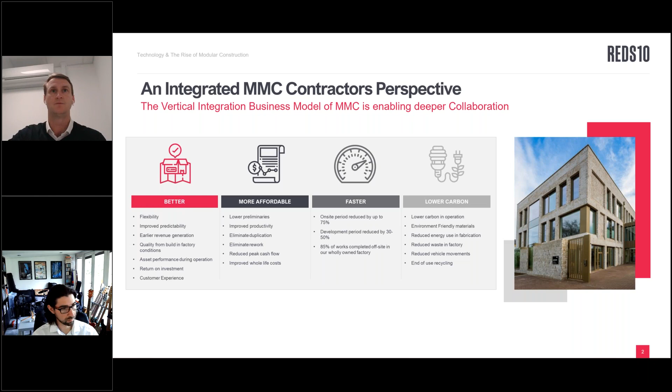More specifically about MMC collaboration - I think when everyone talks about it, the buzzword often mentioned is 'get the design team involved earlier.' However, there are a lot more aspects to it which feed into that collaboration, which I'll go through now.

First of all, you've got the factory element - the guys actually on the factory floor. We're getting input from the guys who are actually building it. Because we're vertically integrated, we've got that line of communication - we all work together within a factory environment, so they're feeding back into us and the design team on what works, what doesn't work, and we're getting real-time feedback.

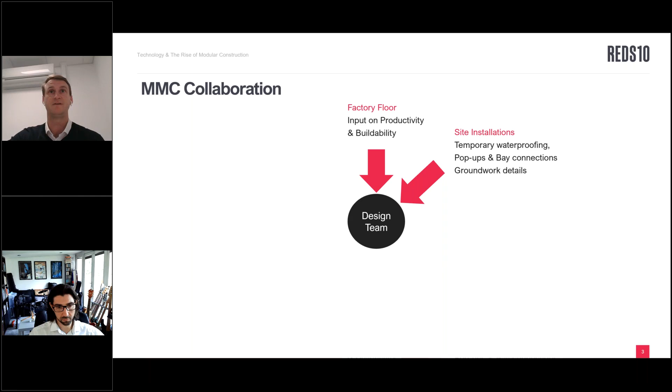Also, we've got the site installation team, so what works in terms of when it goes to site - how we leave the roof, the bay joints - that's all fed back into the process and to the team. A really important part is the pop-up and bay connection, so below ground drainage and so on - I'll come onto it later and show an example of a builder's work hole and how it's used, and how through having a federated model we can coordinate where the pop-ups are and make sure they're in the right place.

The site fit out, so we can improve the speed of the site fit out. We're reducing the amount we'll have to do on site, and we're increasing what we can do in a factory. And as I touched on earlier, this is helping with reduced site programs.

Cost, so the design reflects the budget. Also, one thing we have found on cost is we know our costs because we're building the same thing again, and we're getting to a stage where through collaboration and standard details and federated models, we know exactly what it costs us to build because we're doing the same thing again and again. So we're getting that cost advantage, and also we've got the opportunity to reuse any stock materials we have.

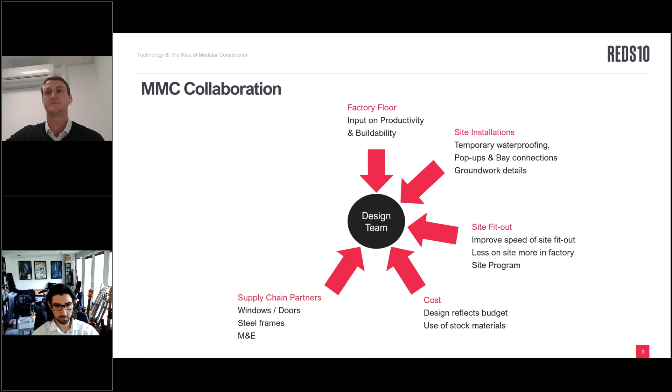Supply chain partners. A big part of what we do is we involve specialist subcontractors very early in the process and get them to work with the designers. So that might be the external windows and doors. There's always a lot of detailing around that, internal doors, the structural steel frames, the M&E subcontractor. These guys and the supply chain partners we've got are all working in Revit, and they're feeding into our standard details and liaising with all the designers. So we've got the collaboration there as well.

Also, the compliance with building regs and any specific client requirements. When I talk about client requirements, specifically if there's net zero, you're designing for net zero from the outset. If there's BREEAM or a DREAM requirement, again, that's the whole team working on that from the outset, and smart building technology.

And then also we've got the federated BIM model with standardized details. So if we just go.

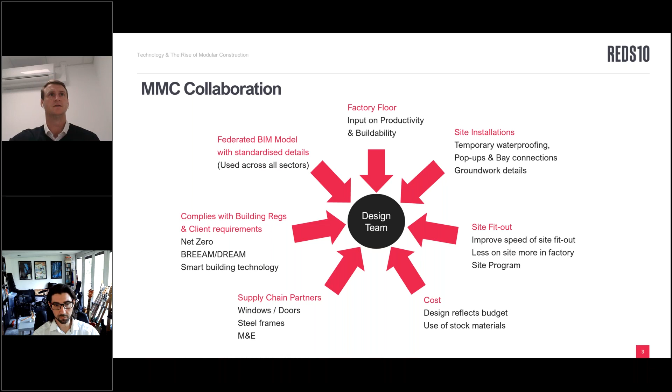So development of a fully federated model. All of the items on the previous slide feed into and inform the federated model. This is helping us to improve design coordination. Elements such as pipe, clash detection there. You can see on the diagram we've got some examples of pipe and containment, AC and FF&E and dado, and that type of thing. So it's helping with those.

And it's increasing our PMV, and ultimately it's reducing site works. So yeah, those diagrams there just show some examples of M&E and FF&E clash detection.

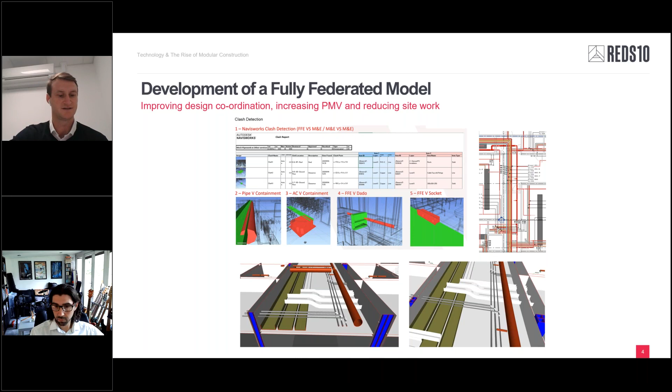Next, coming on to standardization of design and the power of having a fully federated model. This slide shows some of the standard details we build to in our factory. We keep these stored centrally and continuously review and update these. Also, we've got constant feedback coming back from the guys on the factory floor.

Our operatives are actually doing the works. So if they say a detail doesn't work for any reason, that's fed back into designers who then update the standardized detail. So there's that constant sort of 360 review going on.

And also, I mentioned earlier, you can see the bottom three diagrams there. It shows the standardized detail for a builder's work hole, and then you've got the 2D plan there, which references the detail for the builder's work penetration, and then finally you can see it in action there, where that green box is the builder's work hole for the pop-up for the drainage there, and that's all modelled and overlaid.

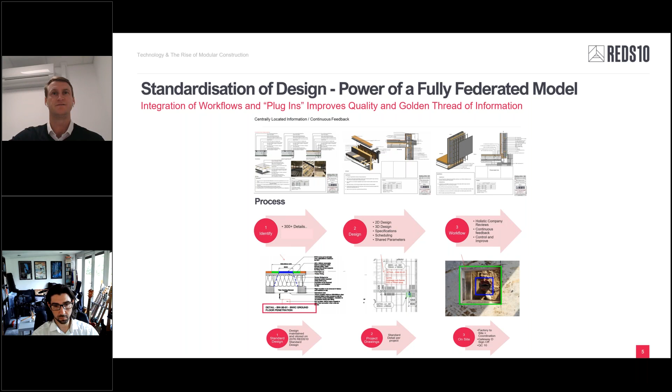One thing we do is we do an as-built survey scan of the drainage and the foundations. We then overlay the federated model on that before it comes to site, so we know our builders work holes are accurate and the drainage is in the right position. So that's a great advantage of using the federated model and the whole collaboration around it.

Ultimately, the MMC and the whole collaboration is helping show how we can reduce both the embodied and operational carbon. And I think MMC has given us a head start on this.

And that was things such as removing the concrete floors and going for a CaberFloor particle board. So we lost the embodied carbon from the concrete there, and going from having china troughs and urinals to having metal instead.

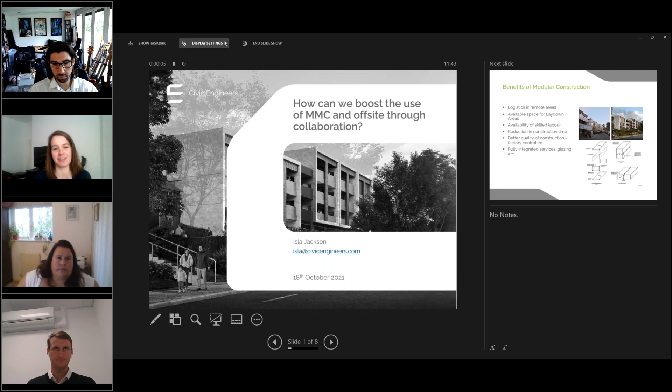Morning, can you hear me and see my screen? Yep, all perfect, brilliant, thank you. So morning everybody, my name is Isla Jackson, I'm Director for Civic Engineers in our Scotland studios, and we've been working on quite a few projects recently to do with modular construction and offsite construction.

So the benefits of modular construction, I'm sure you're all well aware of it, particularly in logistics in remote areas. We've got a project up in Shetland, for example, which I'll touch on further in the presentation. Availability for space and space for laydown areas is also very helpful. Availability of skilled labour, again, particularly where you're performing construction in remote areas. Reduction of construction time, which has already been touched on, and better quality of construction because it's factory controlled, with fully integrated services and glazing, etc.

So the project that we're working on in London, that you can see on the right hand side of that slide, is 215 homes in the London Borough of Greenwich. Basically we've been working with the contractor to develop the modular construction for each of these modules. I think there's still a way to go yet in terms of optimization, but it's been a real learning curve for us as civil and structural engineers to really try and work with the factory and make sure that we're making it as efficient as possible, both in terms of being able to fabricate it easily, but also from a constructability point of view.

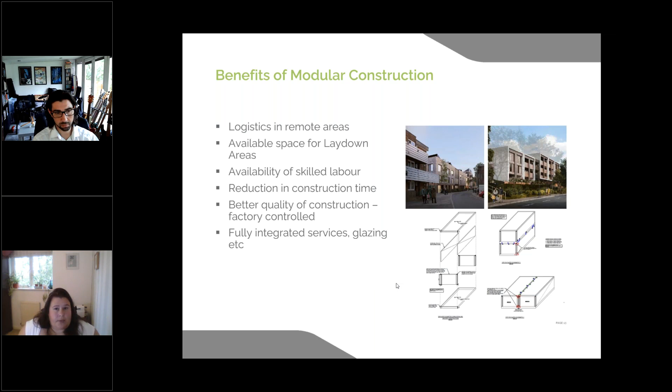But there are challenges, and I think this is probably the angle I was coming at it from - how do we actually approach these challenges for modular construction? I think what we've learned certainly recently is that early knowledge sharing, both between the client and the contractor or the manufacturer, and early coordination, particularly for things like balconies and details like that, is the overall responsibility - particularly in Scotland, and I'll touch on the difference between Scotland and the rest of the UK in terms of who's responsible for the overall design and structural stability of the building.

But there are other things we need to look at, and fire stopping in particular is something that should be considered. There have been a couple of incidents - can you still see my screen okay? There's been a couple of incidents in the Shetland Isles in particular where there's been fires, one in the Moorfield Hotel and also the Fair Isle Bird Observatory, both of which buildings were lost. Luckily no loss of life, but that is something that makes people a little bit nervous in terms of modular construction.

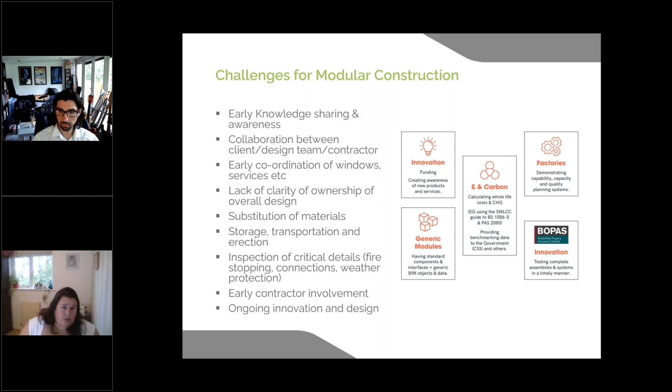Perhaps we can have a discussion about that later at the panel discussion. So, slight differences between Scotland and the rest of the UK - we have SER, the Structural Engineering Register in Scotland, and that means a certified engineer has to take responsibility for the overall structural performance of the building. That means we have to check, even if it's a subcontract item such as balconies, we are responsible for checking that those calculations have been carried out to our satisfaction, to make sure the building has an overall owner, if you like.

And again, following the Grenfell tragedy, there is more of a highlight going forward - I think it's the new fire safety bill, which is looking to have an accountable person on projects. So that may become more and more a thing that's highlighted across the full UK. But it is quite interesting when you're doing projects both in Scotland and England, how different it can be in terms of the approach and how you use stage warrants, etc., for building control.

So this is just an image that was taken from the iStructE. They're busy at the moment coming up with all sorts of different elements. Again, I think Michael touched on the advantages of modular MMC in terms of the carbon, but I think we need to have a look at it and really challenge ourselves as designers in particular.

As you can see at the beginning, 50% of the embodied carbon would be within that first section of either product manufacture or design. So we really have to challenge ourselves as to where the materials are coming from, how they're being transported to site, and the manufacturing methods included to really get the overall view in terms of how well it performs in embodied carbon.

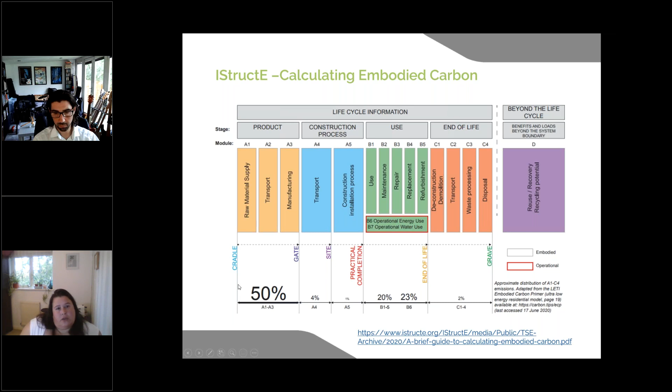However, there's also the circular economy element, which is more and more coming to the forefront. Actually, it doesn't go cradle to grave, it's more cradle to cradle. We should be looking at how we actually deal with those buildings, how we take them apart, how we reuse and put that back into the system.

So this cradle to cradle circular economy approach is probably something we'll see more and more, particularly as the industry as a whole is starting to challenge itself in terms of how we design things, selection of materials, and how we go about minimising our carbon footprint.

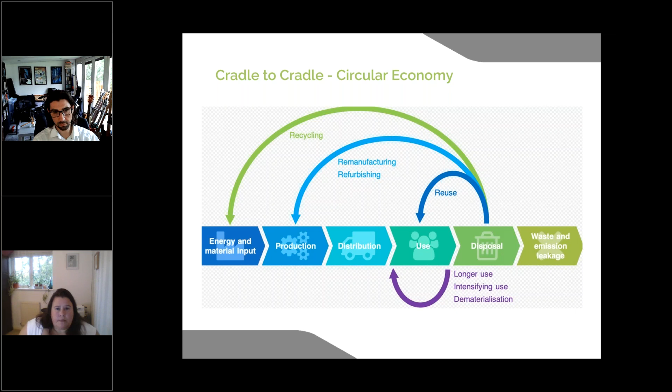This is just really a slide to show that in terms of reuse of buildings, if that's an option, that is preferable, I suppose, to knocking them down. It's the combination of modular and building reuse that is really interesting. More and more we're seeing existing buildings being renovated and modular construction, because of its weight savings etc., being used particularly for residential to place penthouses and apartments on top of these existing buildings.

So I think there's a real opportunity as an industry for us to look at how we calculate the carbon correctly, and to not kid ourselves that it's just a one-size-fits-all approach. Obviously we have to look at the whole thing, and that could be from the reuse of foundations from an existing building if it has to come down, or if there's been a fire, for example.

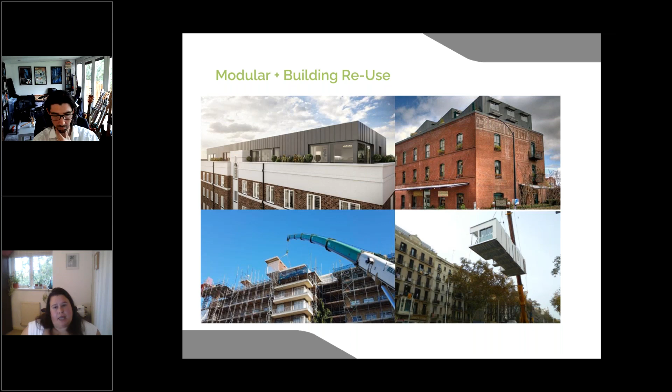So I think there's lots of things to consider. There's a way to go yet, but my sum up would be it's that early involvement, real challenge at the beginning with the client's buy-in to the material selection and how we actually go about designing it, and making sure we have somebody overall in control of building for all elements so that it can be looked at holistically. And that's me for just now.

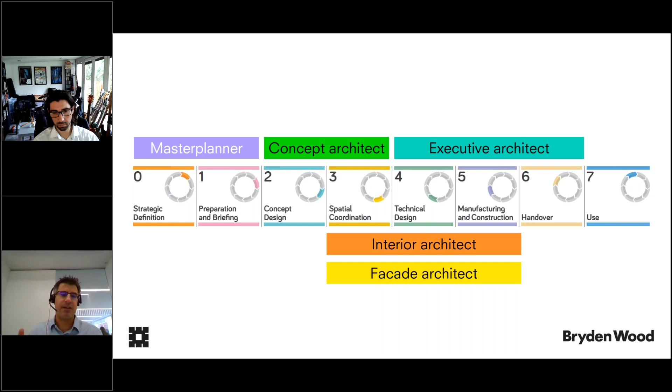We also, for very good reasons, split projects into what we assume is a very linear, sequential way of working, and very often people only work on one part of the project - the first couple of stages, or the concept, or whatever. As Michael said at the start, MMC is not really like that. We can be considering something in the manufacturing stage, and it might tell us something about how we should design the overall building - if you worked out you could get much greater flexibility of spans or grids, it might tell you something about the concept design. So MMC likes to bounce around between all these stages, and it doesn't really recognize the artificial stages that we've put in.

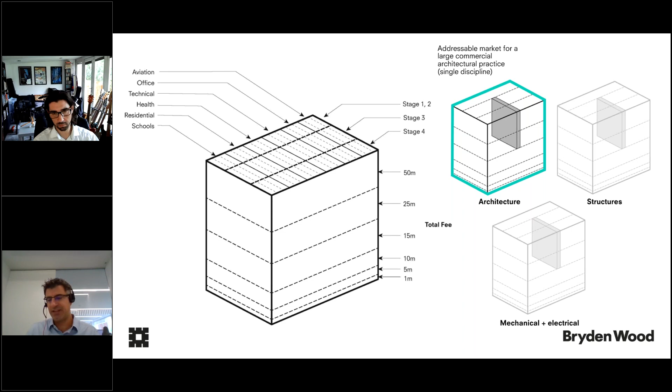People also tend to work by sector. On the right hand side, that's showing if you're an architecture practice, you might only be looking at one sector, one part of that sector, in one discipline. Again, that's a huge problem because MMC requires us to be completely sector agnostic - it doesn't recognize these boundaries between discipline and things. So the fact that lots of people are only ever looking at one part of one sector of one stage of the entire thing, that's a massive barrier, and it's the sort of thing we need to overcome.

Luckily, government has recognised this, and it amazes me that more people aren't joining up the dots. Government's been on a mission over the last 4 or 5 years to genuinely transform construction, and they've been incredibly persistent and consistent in the messaging around this. The starting pistol, if you like, was the autumn statement back in 2017. Lots of people quote the line that says a presumption in favour of offsite - that was in there, but it was a summary of a much longer statement. What they actually said was they're going to use their purchasing power to increase timeliness, cost effectiveness, productivity, and I would add carbon, through the use of modern methods of construction such as offsite.

So government said the outcomes need to improve, the process needs to change, and for sure offsite's part of it, but that's not the problem statement. The problem statement is productivity, timeliness, cost effectiveness, and all these things. Over a period of years after that, government kept getting more and more detailed in its vision. So if the autumn statement said we're heading in that direction, they're now starting to say the end destination is this point.

Back in 2018, the IPA, the Infrastructure and Projects Authority, put a much more detailed statement and said we're going to start to look for common components, make those at scale, and that's how we shift into the manufacturing space. The same week as that, they set up the hub and said the hub is there to enact that.

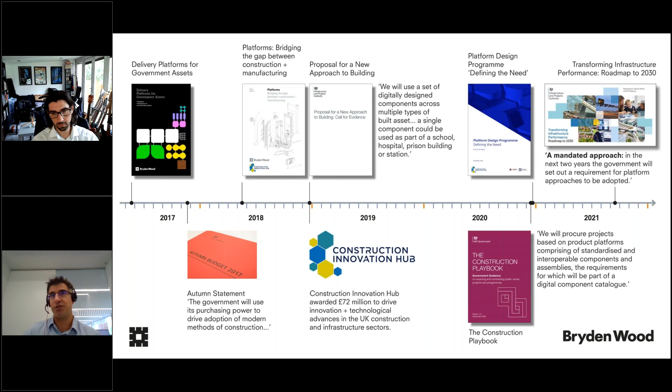Over the last couple of years, they've then said quite specifically it's these sorts of components, these sorts of approaches. So government now, as it said in September, is going to mandate a platform approach. The last time they did a big mandate was BIM, and it shifted the entire industry. They've said they're going to do the same thing again, but looking at componentization, and I think that's a huge opportunity for the industry, but it is going to dramatically change a lot of roles and things.

So the obvious first question: what are construction platforms? I'm really hoping that this is going to work. You should be able to see a video about now.

Hi, I'm Alistair Hellier, Head of Benchmarking for the Infrastructure and Projects Authority.

I'm going to explain in this animation how we need to change the nature of our interventions in the built environment to address the need for social infrastructure using platform approaches to construction.

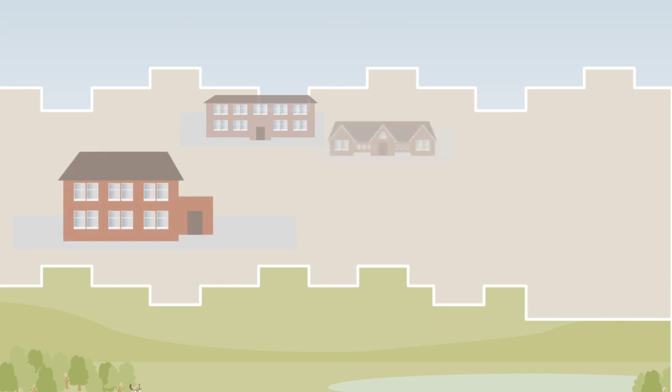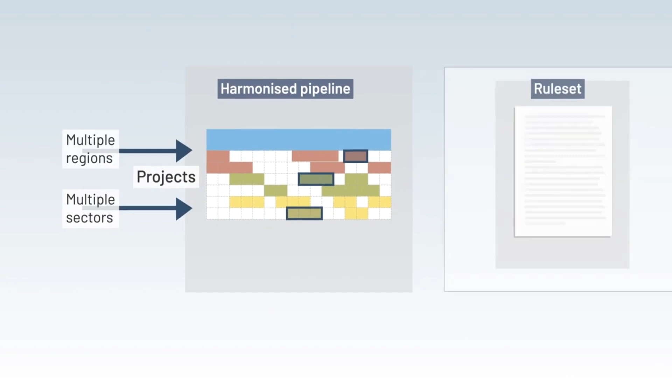We normally deliver public buildings as standalone projects, and we could deliver more efficiently if we took a different approach. If we could get a shared view of what projects are in the pipeline across the public sector, and if we could see which elements they have in common, we could use that knowledge to invest in construction platform solutions that everyone can benefit from.

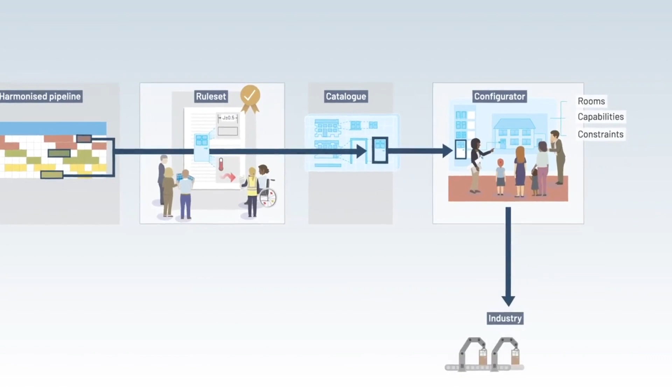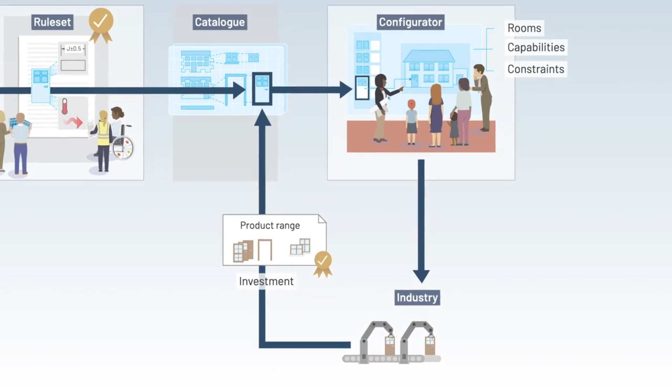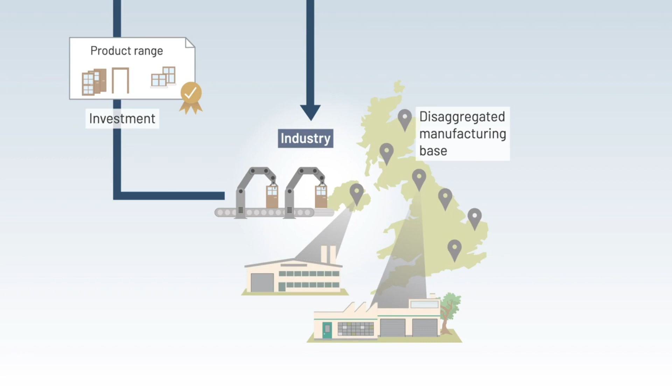Having a predictable pipeline and clear rules for platforms would give industry the confidence to invest in product ranges. Products that could be configured digitally, bespoke to the project context, but consistent with the rule set. It would also mean that the associated investment in manufacturing assembly, creating inclusive employment, could be spread across the country, with the assurance that all components will work together as expected when they are assembled on site.

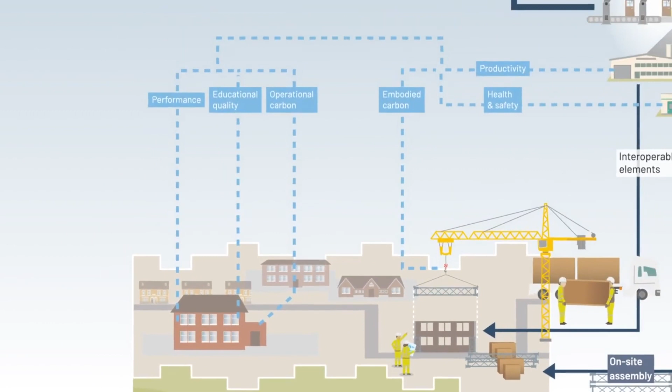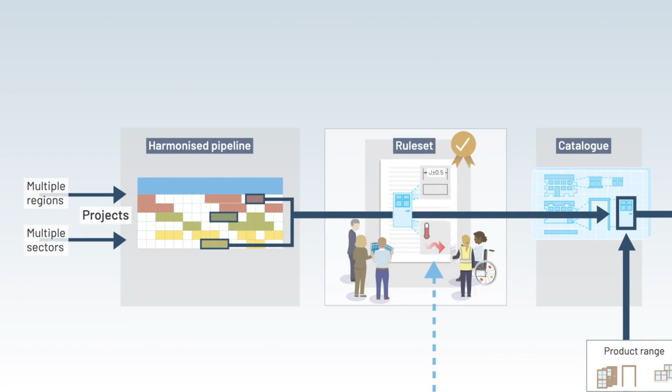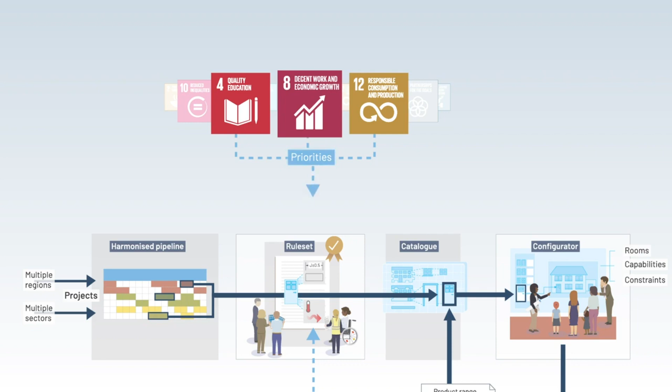Implementation data could then be used to feed back into the system, so that the learning leads to improvement, not just in a single building, but to the design and delivery of all future projects created using the same construction platform or products. This learning will help us understand whether our investments are actually achieving the priority outcomes we were anticipating, and lead to a virtuous cycle in how we use the built environment to meet the needs of each citizen.

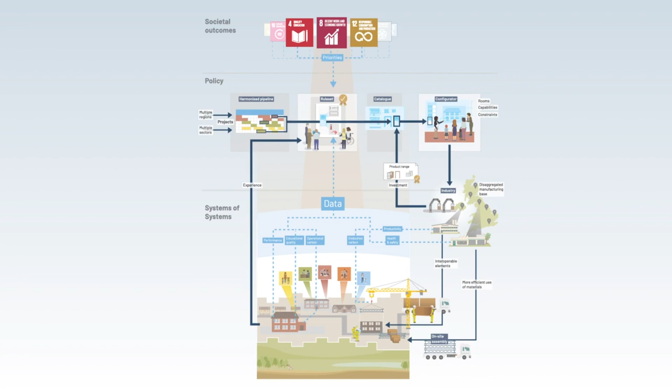Hopefully you can see my slides again. Can you see my slides? Yep, all perfect. Oh, that worked. Well, I was a bit nervous about that.

That's an incredible vision, and this idea of getting down to a level of granularity that you then start to really enable people to manufacture things at scale. That I think is a huge step forward.

One of the things that the government did to put that in place, hopefully everyone's seen the construction playbook. That itself was a collaboration between government and industry over last year. I think it could only probably have happened in lockdown, but I thought it's phenomenal that government used that opportunity to say, let's get everyone round a virtual table and let's start to really shape some of these policies. So one of the key ones here was to stop thinking about projects or even programs or even sectors, but say, how can we get above that and start to really identify commonality at a much greater level that will allow us to do all these things and therefore drive these sorts of approaches.

To fuel that policy, around the same time as the playbook, the hub published its Defining the Need report. Anyone who's not read this, I think it's a fascinating piece of work where we took £50 billion worth of future pipeline of big departments, wrangled that into a common data set and started to say, rather than look for why each sector's special, let's look for why they're the same.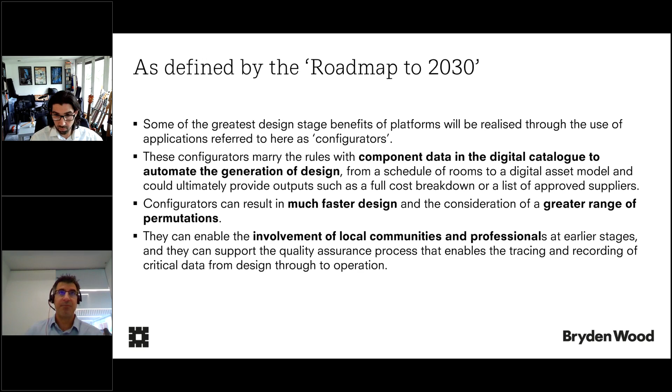So we're going to see, I think, a very different way of designing in the future, where everything is not designed from scratch. Things are configured from standardized components, and we'll use that speed to do more simulation, more testing, and better optimization. We'll get better designs as a result, but it will transform the value proposition for designers. Bryden Wood have been developing loads of these.

Hopefully everyone's seen some of these configurators. At least a couple of them are free and open source. So one of our contributions is to allow everyone to see how we're developing these configurators and hopefully pick them up and run with them.

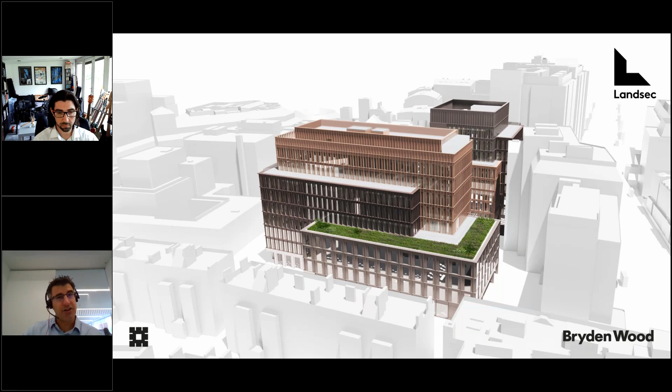Last couple of slides. The other thing this will unlock is automation at a level we probably haven't seen in construction previously. This is a building we're doing for Landsec - it's the first commercial office using a platform approach. Architecturally it's not constrained by the fact that it's generated from a suite of components, but all of those components know how they talk to each other, which means we've automated the modeling process.

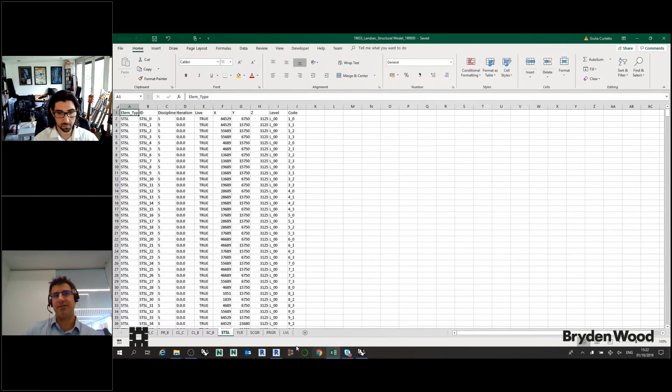So we don't make the BIM model or model the BIM model - it's generated from a data set from some key parameters, and actually the BIM model is a view of that data set. We didn't model it from scratch, and every time we changed something or wanted to tweak the model, we just generated a new one. So we've seen a massive increase in the speed of ability to create this sort of information.

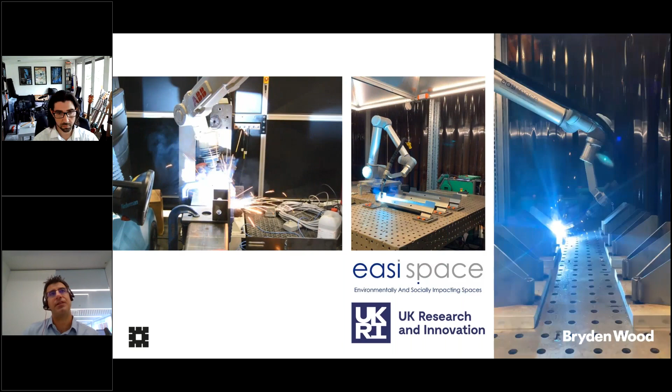We literally, the same components we use in our models, we didn't even draw them - we sent them directly to a company called Easi Space, a tiny little SME, but they've geared up and invested in robots. They're the first company qualified to cobotically weld structural components.

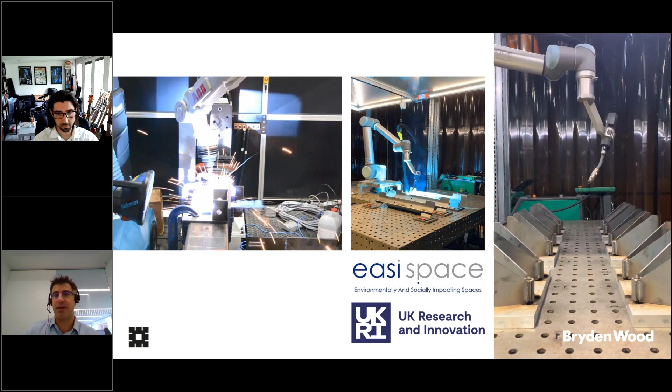All of that kind of handover of information has disappeared. We literally model it once, send it to Easi Space, they cobotically weld it, and we've got millimeter or sub-millimeter accurate components coming straight to site, solving all the normal problems of tolerance and fit. This was then how we're building the building.

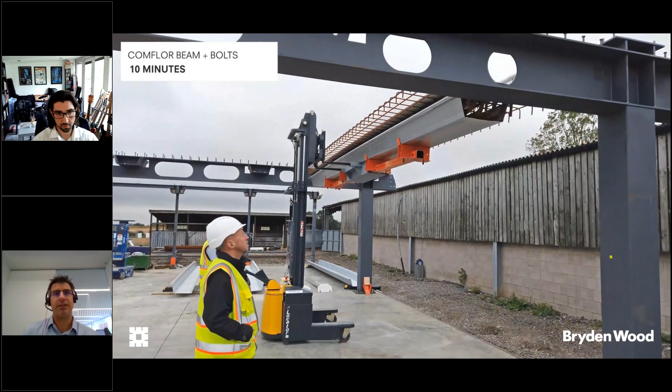This was our prototyping center, but we're building it for real like this. You can see here a handful of people - we're able to use non-construction people because all of the tasks are very straightforward. Again, super accurate components - we're measuring things in minutes.

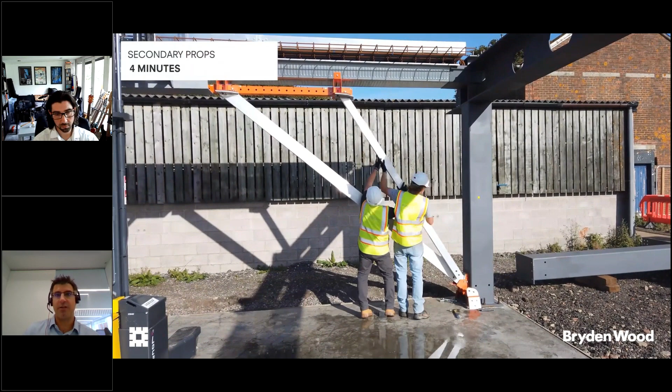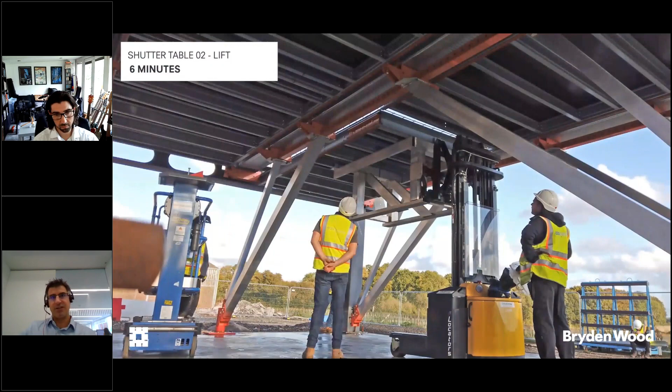The purpose of this was to see whether we could build the entirety of a superstructure from the floor below, so no one has to work at height. So you raise all the components, they clip into place. Again, super accurate - we're using low carbon concrete, less concrete, robots weld it.

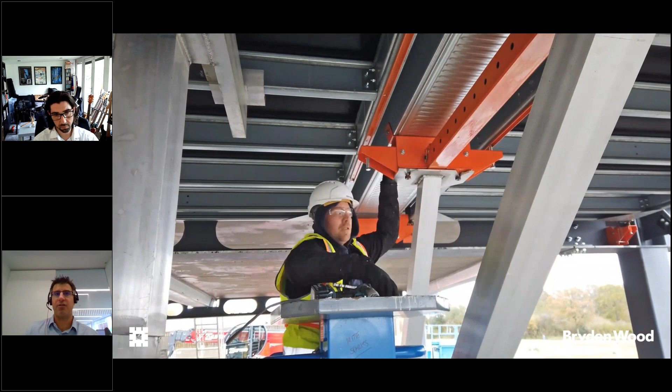So we're getting dramatic increases in productivity, much better accuracy. You'll see here when the shuttering comes down, all of the mechanical electrical fixing points are already cast in. So the MEP is also a kit of parts that clips in, the facade's a kit of parts that clips in - we're seeing dramatic improvements in every part of the building process.

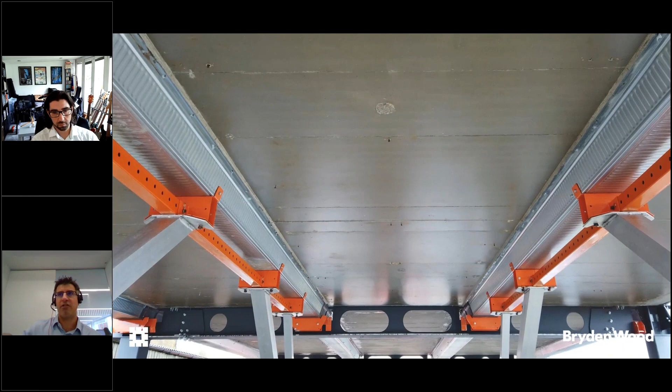One of the key things for us is, rather than try and do everything off-site, we were saying if we can create factory-like conditions on-site, then we don't have the cost and amortization of the factory, we don't have the transport costs - so we start to tackle all of the wider bits of the ecosystem.

This is my last slide, but you can see here, this is the UK's first net zero commercial development as tested by the UK Green Building Council. That's not coincidence that we're using platforms and getting that sort of result - 24% reduction in embodied carbon, it's net zero in operation, and we've seen a 30.5% productivity gain on the first building that we've done in quite this way. So you can imagine that number's going to increase.

But if you imagine those sorts of benefits multiplied by the scale of that 50 billion, you can see why government's heads in this space. And you can see that within a couple of years of the mandate, we're going to start seeing some dramatic improvements in productivity and cost and carbon. But it is going to require quite a different mindset, I think, in our design, procure, deliver community. So that's, I think, a big topic we need to start really engaging with as an industry.

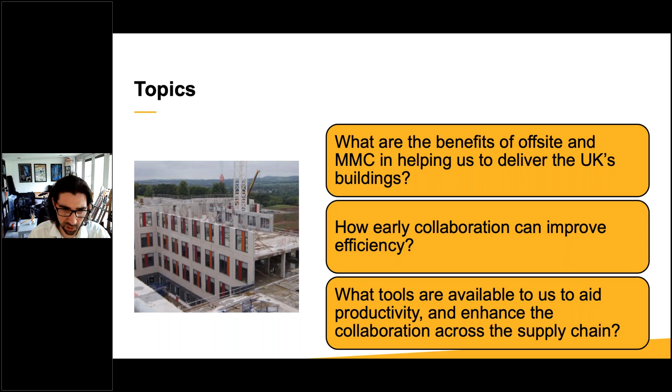I'm just going to quickly go through a few of the topics and then show a video at the end, which is quite an interesting video recently. So what are the benefits of offsite and MMC? How can early collaboration help improve efficiency, and what tools are available for us?

In terms of benefits, a lot of the other panelists have already touched on these, but one of the main questions I'm asked as a QS by background is: is MMC cheaper than traditional? I know a few of the other presentations have touched on that, but I would say it depends, in terms of just pure cost, on many factors, such as site logistics, types of materials being used, etc.

But I think what's unquestionable is the program benefit from using MMC, and obviously with a program benefit comes a cost benefit. The other issue is you also get a reduction in risk. That kind of controlled atmosphere you can actually build means that if you're looking at the difference between a contract sum and an outturn cost, you'll find with MMC projects they're a lot less risky. Therefore, you often need to put a lot less contingency on top of the projects because you're dealing with a lot of the issues up front.

So that perceived saving in program is really important, because by making sure you lock that in, you are in effect also getting a cost saving to go with that. But the big 'but' is that the design must be sufficiently advanced, and you must ask yourself what are you trying to get out of MMC. If it's just cost saving, undoubtedly there is some associated with program, but that is not the only benefit. There are so many other benefits we'll touch on later in terms of quality, program, net zero carbon, all those other things that go with it. And then the cost benefit is often a side consequence of all those things.

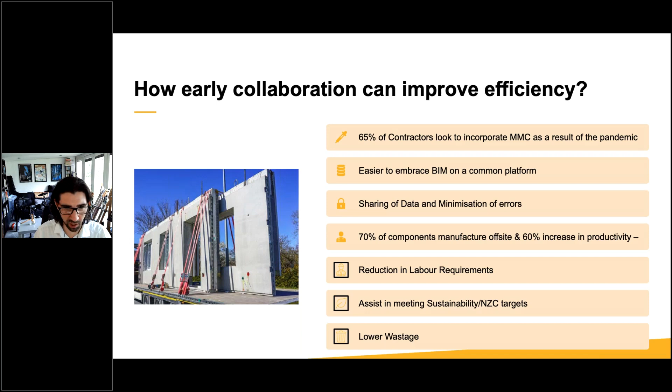I think it's important to remember a lot of clients and consultants are still stuck in the 'is MMC just modular?' mindset, and making people aware that there's different types of MMC, panelized and component systems.

MMC can also assist on our path towards true smart buildings, because it enables you to build in the requirements, the sensor requirements and stuff early on. We've started to change our language a little bit around PMV, pre-manufactured value, because it's that pre-manufactured value that leads to the greater efficiencies, which leads to the less wastage, which then obviously gives us that better carbon footprint.

The last point I wanted to mention was around project data analytics, and I think Jamie talked about this in terms of automation and generative design. I think we're at the thin end of the wedge here where we're going to see that become more and more important. The fact that MMC lends itself to providing that data means we're going to be able to start training machine learning algorithms, automation, robotics - all those things are just going to enhance what we do. So that's my last slide.

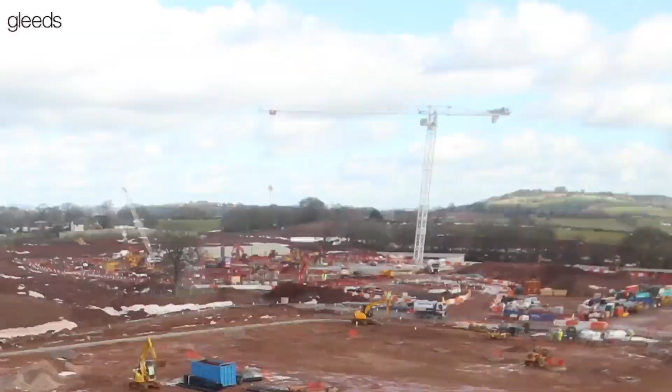Gleeds, as project managers, led a collaborative team and using off-site manufacture were able to hand over the hospital to their client 4 months early, under budget, and all in the middle of a pandemic.

First, let's hear from Victoria Head, the project director at Gleeds, who helped drive a target of 23% savings on programme. What was the brief, and how did she and the team respond?

The Grange University Hospital was always going to be something different for us. Gleeds committed to wanting to put an innovative approach around this project. It was a very important project to Gleeds. We've been working on it for many, many years and wanted to bring into it the modern methods of construction that the industry were just starting to take up.

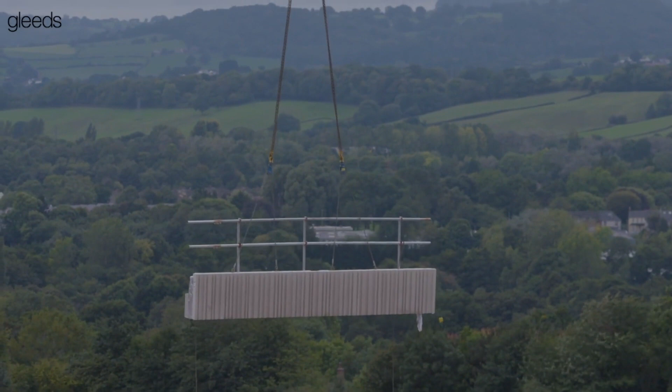Our client's brief was around efficiency, innovation and speed, and we responded through using modern methods of construction. We were committed to giving the Aneurin Bevan University Health Board a hospital of a great product as quickly as possible. So when the Grange construction and the design and putting that together came about, we were obviously keen to get this building up and ready as soon as possible.

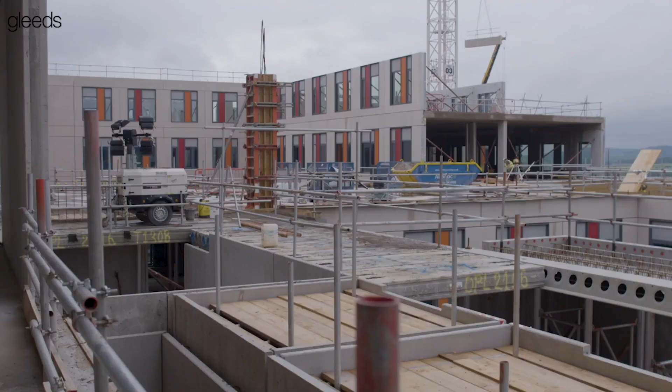What was exciting about this particular opportunity was the whole team was up for doing something differently and where we could push the boundaries of modern methods of construction. So we really looked at what we could explore and bring to the table in regards to what we could build off-site rather than build on-site.

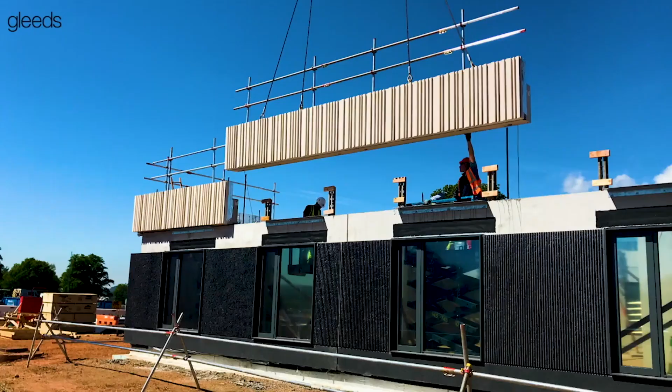There aren't many public sector projects that will say that they will be opening 6 months early in the midst of a pandemic. So we believe that this is a success story that we want to roll out to other clients, be that public or private sector. There is learning here that is ready to be used for other projects.

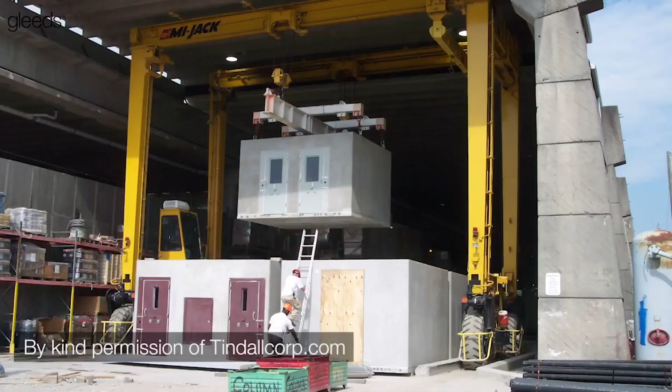In the USA, the new build prison program is delivered through offsite manufacture. Chris Williams in Atlanta told me about the numerous 1,000 to 3,000 bed state prisons he has been involved in and why the client insisted on offsite manufacture.

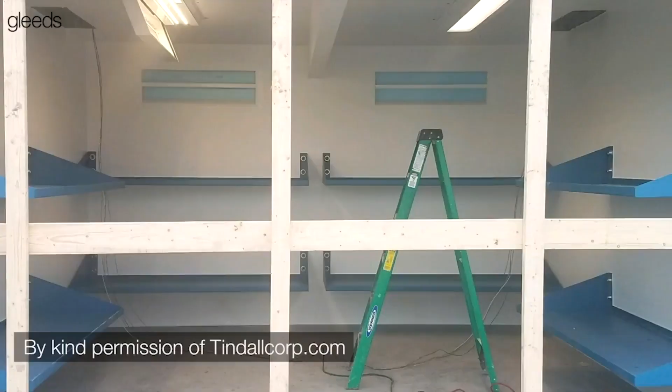In the United States, it's pretty much the norm to use modular construction for jails, particularly in the housing blocks. Gleeds have been involved in many projects over the years using both concrete and steel cell modular construction. So the reason that our clients want to use modular construction for jails is a combination of reasons, one of which is speed of construction. The other, and most importantly, is the quality of construction.

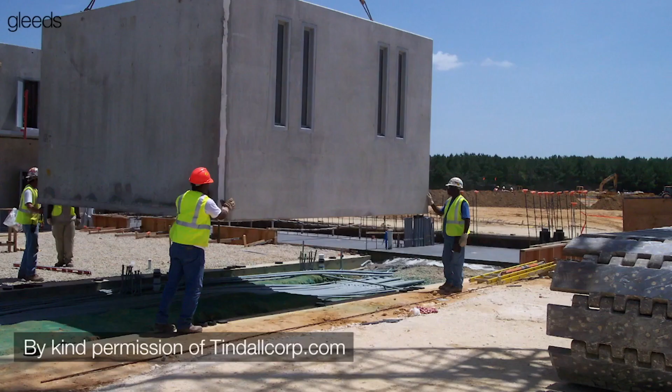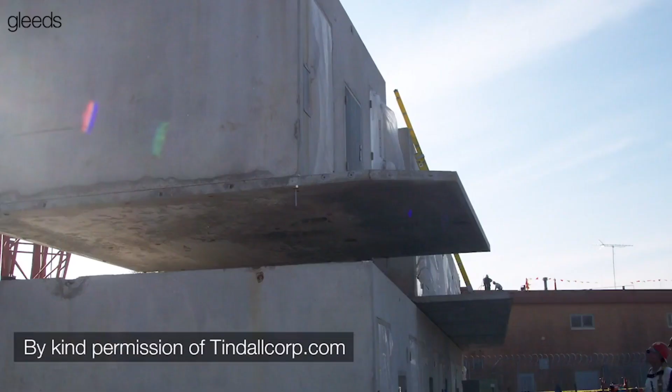Each pod or jail cell is essentially the same, so there's a lot of repetition. And particularly with precast, you can just really stack them on top of each other. And when you use precast double T's, essentially all of the structure then becomes modular and goes together very quickly. The toilet is fitted out, the hand basin is fitted out, and the bunk is fitted out. Definitely one of the benefits of modular construction is knowing that these are being built off-site safely and securely.